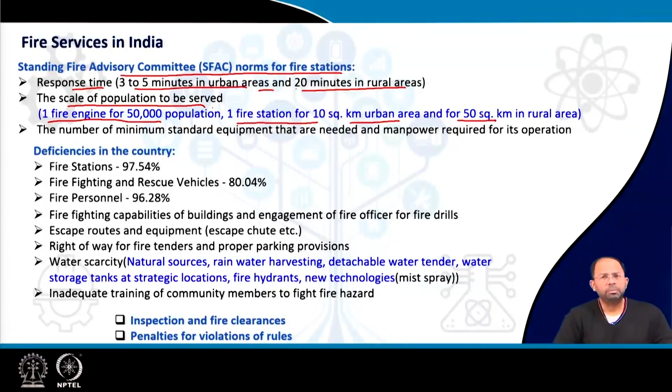Considering the scale of population to be served, the norm is around 1 fire engine for every 50,000 people and 1 fire station for every 10 square kilometers of urban area, and for rural areas 50 square kilometers. So if 1 lakh people stay in 10 square kilometers, we will have 2 fire engines and 1 fire station. The minimum standard equipment and manpower required for operation, that is, how the fire station should be organized, are also specified in these fire advisory norms.

Now, this advisory committee also recognized that our country is lacking in fire services to a huge extent. For example, the deficiency is to the extent of 97% in regards to fire stations. In regards to firefighting and rescue vehicles, the deficiency is around 80%. In regards to fire personnel, the deficiency is around 96%.

So it's a huge deficiency that needs to be addressed, and that's why there have been many cases of fire in recent years. In many cases, we have found out that the complexity of the events are so difficult.

For example, when there was an event recently in Kolkata regarding one hospital fire, the patients died because they were not able to be evacuated. Then there are other cases where chemical fires are there. How to fight those kinds of fires? In cases where maybe an X-ray or a radioactive machine gets compromised by a fire, how to deal with those kinds of emergencies? So there are a lot of technical concerns also which has to be addressed.

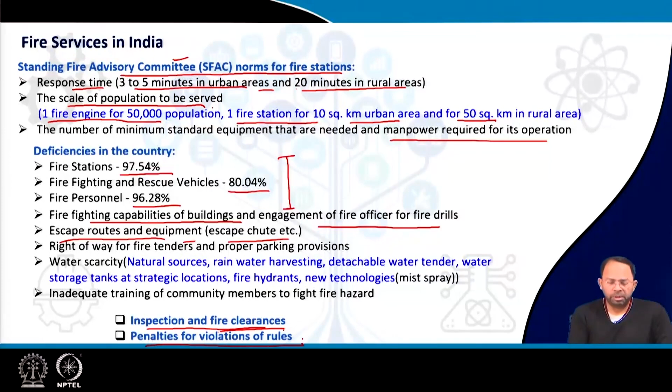Right now it's mandated that every building needs to have fire clearances to be given the final completion certificate, and this inspection and fire clearances are usually carried out by the fire services department. There has to be strict penalties for violation of rules, otherwise people will not follow, or people will somehow go around or bend these particular rules.

Now the other aspect of firefighting is the right of way of fire tenders. In India we have very limited right of way, and in many cases large fire tenders have difficulty negotiating the traffic. So plans need to be formulated, and also proper parking provisions in areas where firefighting will happen—in critical areas there has to be parking provisions so that fire tenders can be parked there and then fight fire.

Then the other aspect is water scarcity. Many of our urban areas are very dense and don't have water bodies nearby. So we have to make provision for natural sources, rainwater harvesting if required.

Detachable water tenders could also be added, and we can have additional water storage. We can also have water storage tanks at strategic locations, and fire hydrants could be laid out. Certain new technologies such as mist spray could be considered for fighting fire, to use less water to cover more area, or to make provisions for storage of water at different locations.

Finally, there is inadequate training of community members to fight fire hazards. We don't have any proper training of community members so that in case of fire they can help in fighting it. So this kind of training could be conducted as well.

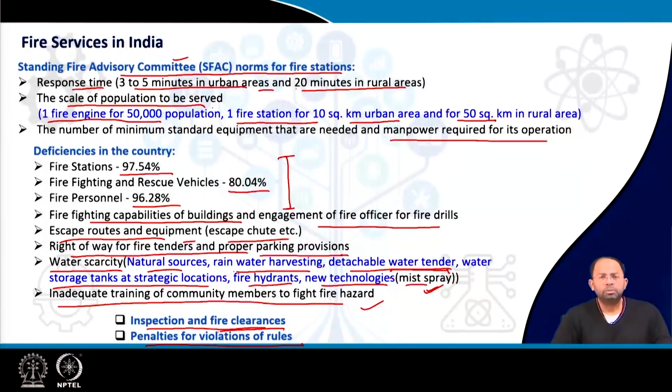So these are some of the aspects which need to be looked at, or these are the deficiencies which need to be taken care of in our country.

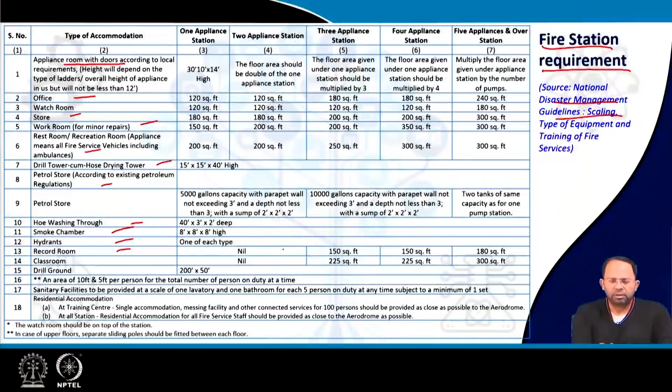As you can see, for single unit fire stations and multiple unit fire stations, these are the values given here. For multiple units, the floor size is multiplied, and we have different sets of requirements for larger fire stations as well. These are standards which could be followed to determine, for a particular area and population group, how many fire tenders would be required, and based on that, what should be the location and size of the fire station. So the size of the fire station can be determined using this particular chart.

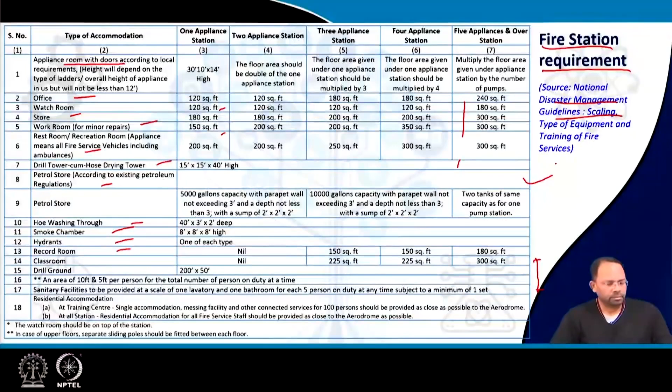So how many fire tenders are required? These are water tenders or vehicles with water tanks used for fighting fire. Usually for 50,000 people we should have 1, for 1 lakh people we should have 2, but for 3 lakh people we can have 6, and for every additional 1 lakh we should keep adding 1 fire tender. This is more or less the standard given in the National Disaster Management Guidelines.

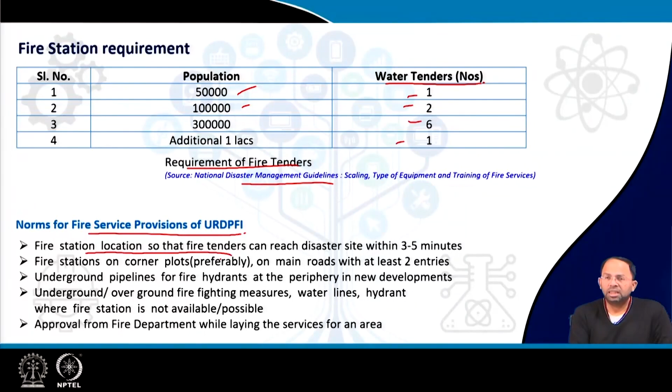As per the URDPFI, there are additional considerations for urban planners on how to provide fire stations. The station location should be such that fire tenders can reach the disaster site within 3 to 5 minutes, same as the committee guidelines. Fire stations should preferably be on corner plots so that movement and parking of vehicles are easier, and should be on main roads with at least 2 entries so the station is easily accessible from other areas.

Underground pipelines for fire hydrants should be provided at the periphery of new developments, so fire tenders can connect their hoses and use that stored water for fighting fires. Underground or overground firefighting measures such as water lines and hydrants should be provided where a fire station is not available or possible. There are many dense areas where at least fire hydrants should be available so fire tenders can utilize those.

Approval from the fire department is needed while laying services for an area, since multiple fire hydrants and other services must be laid out, and permission has to be taken from the fire department as well.

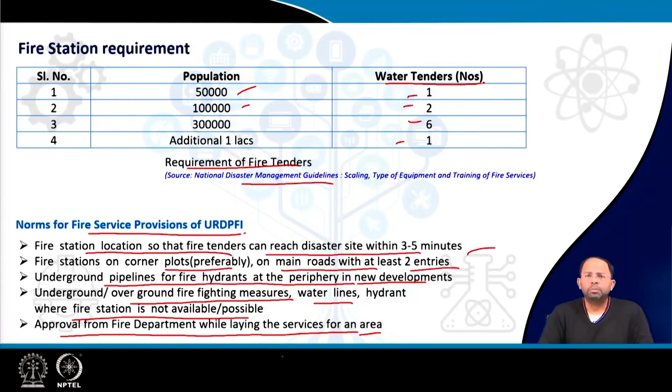Now coming to emergency fire service design, there are different things we need to first understand, such as the fire demand zone. How do we categorize different areas into zones? The zone should have relatively homogeneous land use, meaning it should be roughly uniform. It's better not to mix an industrial area with a residential area, because the hazards and risks are different, so we should have different provisions for fighting fires in each. That's why zones should be relatively homogeneous.

A zone can be a single complex of buildings, a factory producing or using hazardous material, a church, a hospital, or an area of relatively homogeneous structures like a residential area. Now, how do we determine the requirement or the distance for that zone? For that we determine the demand for fire service within a zone.

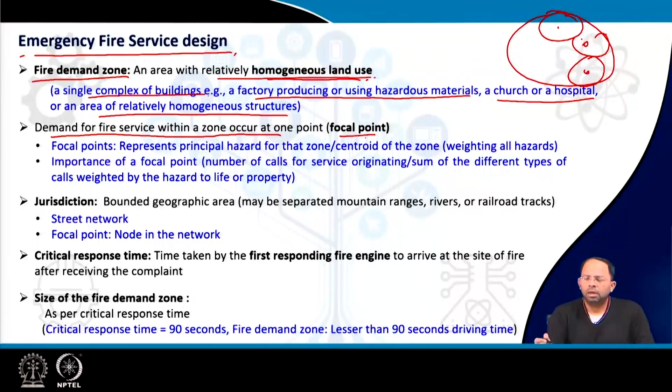We determine a single point, the focal point. If we have a large area, we break it into different zones, and there could be a focal point for each zone. The focal point could be the centroid of the zone, or it could be the major structure susceptible to fire. Whenever we measure the distance or time for a fire tender to reach a zone, we measure it from the location of the fire station to this focal point.

So the focal point represents the principal hazard for that zone, or the centroid of the zone, which could be determined by weighting all the hazards. For example, if a zone has one industry and a residential area, each with different levels of risk, we can assign weightages and multiply to determine the approximate centroid. So it may not be the geometric centroid, but a weighted point based on distance from different risk levels in that zone. It's a representative point in the zone used for further calculations of distance and other parameters.

Jurisdiction is the bounded geographic area, which may be separated. It could be based on administrative boundaries, but it can also be separated by a mountain range, a river in between, or a railroad track. All these things need to be considered when we define the jurisdiction, and we can divide it so that one fire station will serve this part, another fire station will serve another part.

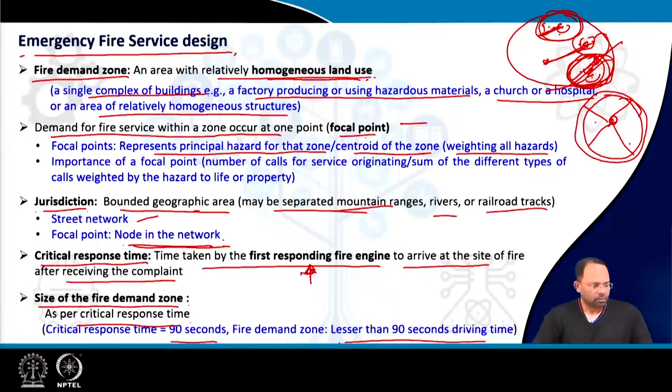Next comes the classification of different risks. Different areas have different risk levels. For example, flammable and explosive risk factors apply to gas stations, LPG stations, and factories. For general hospitals and schools, people are vulnerable, so they have to be evacuated, requiring stretchers and similar provisions. Shopping malls, supermarkets, entertainment venues, subways, and train stations are crowded, so you need to manage the crowd and require other kinds of manpower. Government offices, scenic spots, scientific premises, libraries, science and technology museums, archives, and galleries are key areas which need to be protected.

Residential areas are general fire protection areas, while emergency shelters are emergency protection areas. Accordingly, we can classify these areas as per different kinds of risk, and based on that determine what sort of services or equipment we should carry, or how important that risk is. All these things can be determined from this.

In addition, we can map other hazards as well, such as geological hazards like subsidence, meteorological hazards, biological hazards, human-caused intentional events like terrorist activity, and technological hazards based on certain failures of technology. All these different kinds of hazards could also be present in an area, so that also needs to be considered along with determining the hazard and risk.

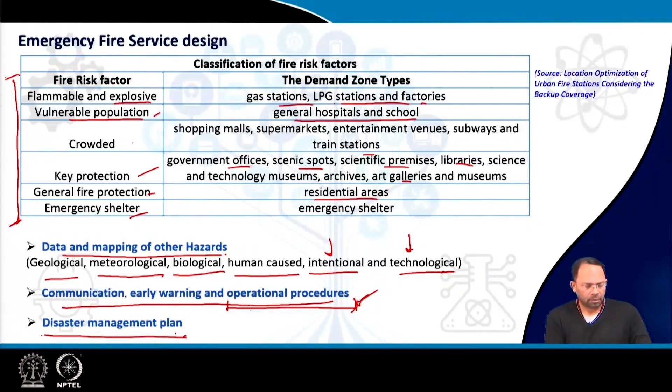So, to determine what sort of hazards, and the time of those particular hazards, we need to create certain databases. Fire and rescue calls and their timings for the last 5 years are usually recorded. For example, total number of fire and rescue calls coming from a particular area, such as number of fire calls, number of rescue calls, number of gas leaks, building collapse, hazardous material calls, animal rescue calls, and other calls. And similarly, we record data on lives lost, lives saved, numbers of injured, property saved, and property lost in financial terms.

Based on all these records, we can determine which zones are more hazardous, what kind of hazard it is, and accordingly we can designate separate zones in an area. And then we also record the timings of different calls received from 7 hours in the morning to evening, and from evening throughout the night to 7 hours. So we can record at what time of the day the calls are coming.

This will help us to understand or predict the requirement for staff and equipment at different times of the day, at different seasons even. So that actually helps us to do trend analysis to determine what kind of manpower we should have at different points of time and what sort of preparedness we should have at different points of time.

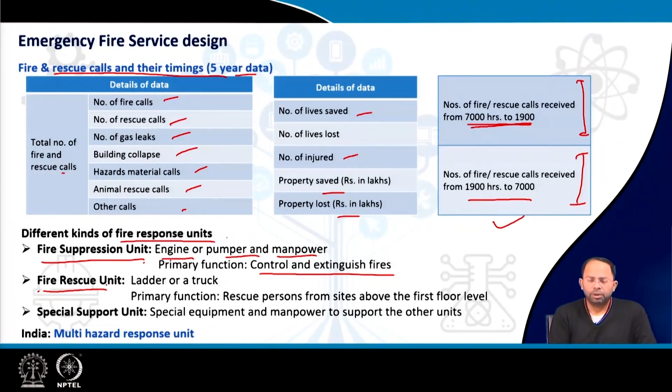Then there are different kinds of fire response units. Usually there is a fire suppression unit. This is a fire tender or a pumper, along with manpower, of course. Its primary function is to control and extinguish fire. Then there is a fire rescue unit, which is basically a ladder or a truck, whose primary function is to rescue persons from sites above the first floor level. So people willing to jump out of a window, or maybe somebody got stuck somewhere. So all these things are important. So this is the fire rescue unit.

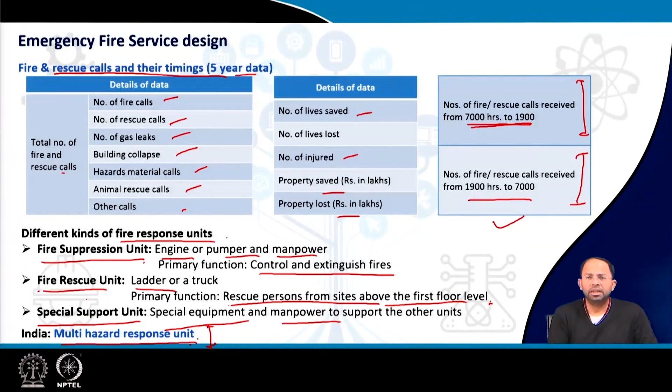And then there are special support units which have special equipment or manpower to support either the fire suppression unit or the fire rescue unit. So in India, usually we have multi-hazard response units. That means units can also respond to multiple kinds of hazards. So we have got different kinds of personnel inside each unit that could be utilized to respond to different problems.

So the response time. Now we have to determine how do I do location allocation of fire services? How do I distribute the different fire stations in an area? So the response time is the primary factor, of course, as we have learned. It depends on the area where the incident has occurred and the pattern of fire incidences. That means in an area, if a fire breaks out very often, at one point of time there could be multiple fires.

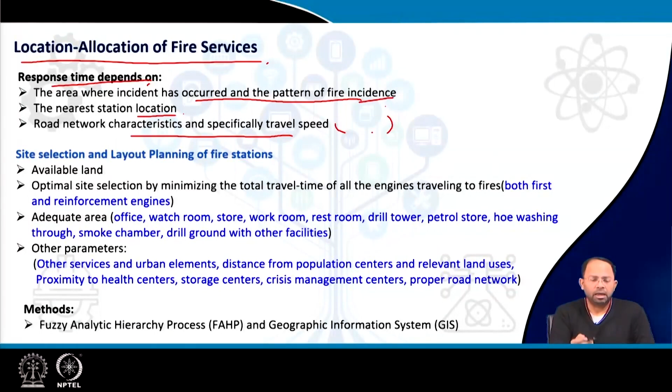So based on the incidence patterns from recorded data, we can determine that, and also the area, how dense it is, what sort of people live there. All these things play a role in determining what sort of response I should provide and in what time I will be able to provide it. Then the nearest station location from that particular area and the road network characteristics, specifically the travel speed that is possible in that area during that point of time. So this overall determines at what distance and at what density we can locate fire stations in an urban area.

Now, site selection and layout planning for fire stations is based on available land, of course. These are primarily government land. Then optimal site selection by minimizing the total travel time of all engines traveling to the fire. We can determine one dedicated fire station or one fire tender for one area, or we can consider that multiple engines will travel to that area from surrounding zones as well. So we minimize the travel time of all engines together. So this is basically a location allocation problem.

And in GIS, we can solve this very easily using some tools. Here we can determine the location of the fire station as per the distribution of events, or fire events and so on. So in case of multiple engines, both the first and the reinforcement engines, both their times are considered, and accordingly we determine which would be the suitable location for the fire engines.

For example, the way we go about is, I have the city, we divide it into different zones. Now I locate the fire stations based on available spaces and all these things. So this becomes one option, and some locations could be skewed.

Then we put a distribution of fire events and see what is the minimum time in which this could be addressed for different fire events. And based on that, we can minimize the overall travel time for that area and determine which should be the best possible scenario for locating fire stations in that area.

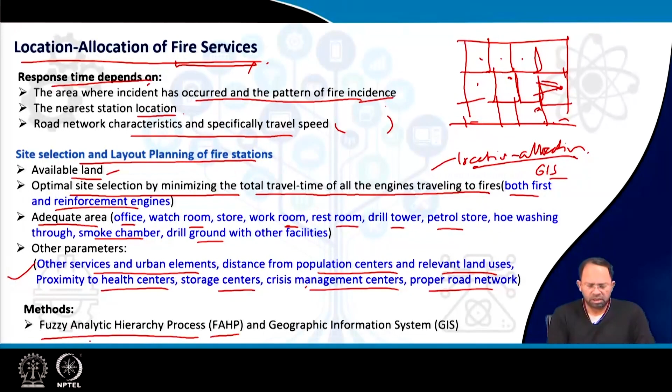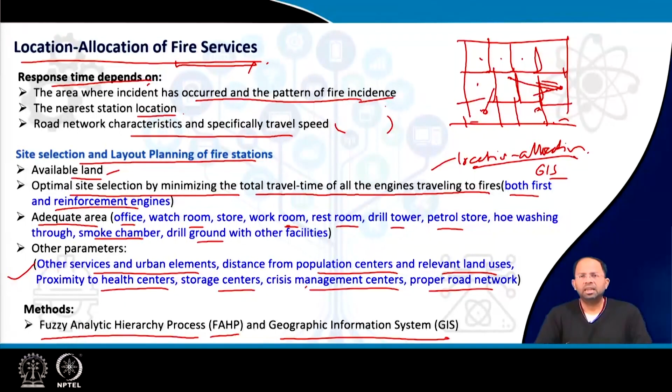And then geographical information system is usually used to determine the travel time or response time to different fire events. And based on these two data, that is the importance of that location as well as response time, we can take a call on which is the best possible scenario for setting up fire stations, or which possible locations are best for setting up fire stations in an urban area.

So the allocation models could be of different types. One could be a time constraint model, where in the conventional approach, the idea is a station has to be located within a given distance or time of each focal point. So we have got different focal points in an urban area, more hazardous areas and so on.

So the fire stations have to be located in such a way that they are within a given travel distance or time from that particular focal point. So this is a constraint-based approach. There is a constraint of travel time.

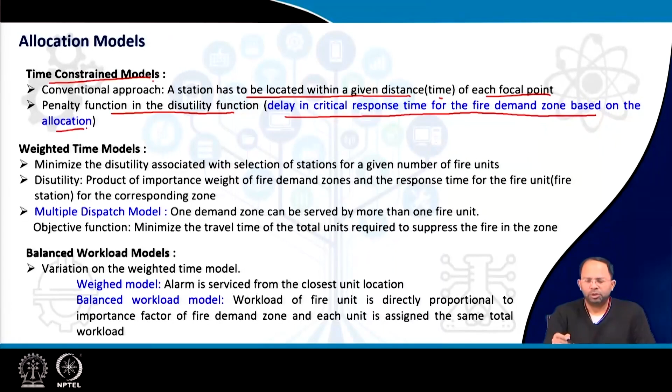The penalty function, so we can use disutility functions here as well. A penalty function is introduced where, based on the delay in critical response time for the fire demand zone, the allocation is determined. Suppose we have a certain scenario of allocating fire stations in an urban area. If I do this sort of allocation, what is the overall delay that is happening?

So we determine the delay in critical response time compared to the standard, and then we change the locations, and for another scenario 2, we create locations at another point, and then we again determine the delay. Wherever it is least, we will adopt that as the best possible option. But initial locations are selected based on other factors, weightages and so on.

Now weighted time model is where we minimize the disutility associated with selection of stations for a given number of fire units, and here the disutility is a product of the importance weight of the fire demand zone and the response time for the fire unit. So it's not only based on the response time, but also based on the importance of the fire zone.

So if an area is important and I am delayed to reach there, then there is more chance of damage. That's why the importance of that area is multiplied with the response time, and overall we determine the disutility of locating these stations, then determine which option is the best option, and then we choose that option.

Now, the multiple dispatch model is a modification of the basic model. In the basic model we only consider that one demand zone can be served by one fire unit, whereas in the multiple dispatch model we can assume one demand zone could be served by multiple fire units from other areas. So in this case, the objective function is to minimize the total travel time of the total units required to suppress fire in the zone.

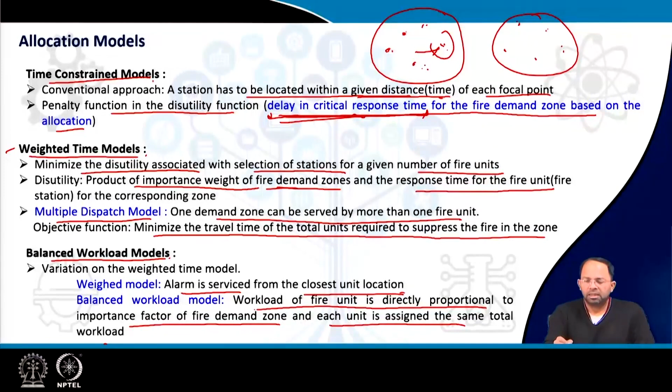Now there is one variant of this weighted time model, which is the balanced workload model. In the weighted model, whenever an alarm is there, that is, an event has happened, each alarm is serviced by the closest unit location. That means the closest fire station will respond to that. But in the balanced workload model, the idea is that the workload of a fire unit is directly proportional to the importance factor of the fire demand zone, and each unit is assigned the same total workload. So every unit's workload should be similar.

So one unit can reach a certain area, another unit can reach a certain area, but the location of the unit should be such that the overall workload for this particular unit is the same, because the hazard and all these things are different for this area. So overall workload needs to be balanced for all the different units. So this is a much more complicated way of doing this. This is the most basic way.

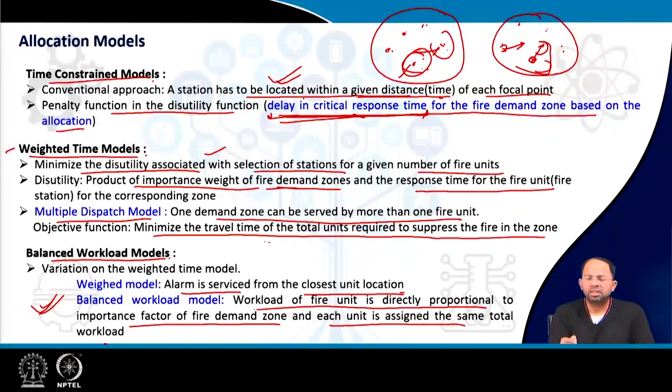This is where a little bit of complication comes in, because you have to understand the importance of each zone, and this is further complicated because we are considering that multiple fire units will respond to one. We can do that here as well, but here we definitely have to understand that each unit has a different workload. We have to balance not only the response times and the importance, but also how much work each unit is doing, and that has to be prioritized.

So this is a case study from Tehran. The selection of location is done in 3 stages. The first stage is pre-selection of certain plots or areas where I can set up the station. This could be done using GIS tools. Here the considerations are land use compatibility, quality of the building, size of plot, building age, level of occupancy, number of floors, building density, building materials. All these things are considered to do some pre-selection of plots where we can set up the fire station.

And then based on GIS tools like union and intersection, which are standard GIS tools, when you overlap different layers you can take out certain portions of it, common shared areas and so on. So using these kinds of standard GIS tools, we can determine which are the available areas where we can set up fire stations. So this is the first step.

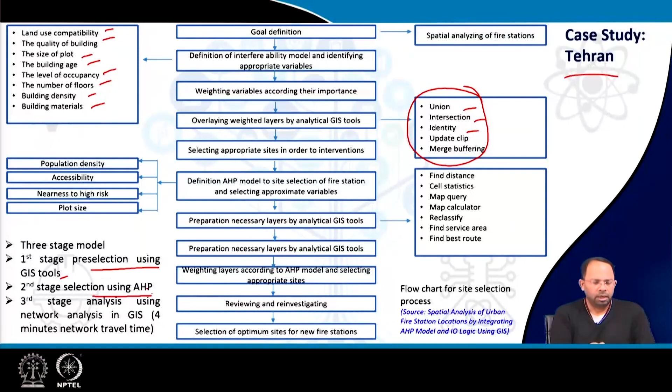The second step is where, using AHP, we determine the importance of those particular areas. Here population density, accessibility, nearness to high risk, plot size, all these things are considered for defining the AHP model of site selection for fire stations and selecting appropriate variables. That means we determine which variable is more important compared to the other using pairwise comparison, and we give weightage to different aspects, and overall this helps us determine the second layer of importance for the different locations.

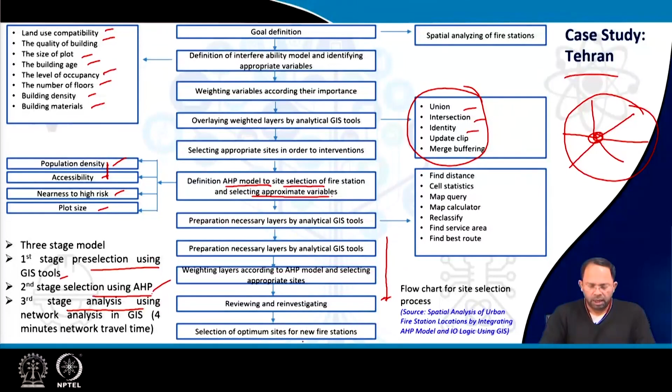The third stage is, once we have determined the importance, we now need to determine the distance of travel or the response time. So the third stage of analysis involves network analysis. Using network analysis in GIS, we can determine from any point or the location of the station what is the time to reach all the other points. We can add this all up to determine a figure for the total amount of time taken for response. So multiplying the importance of that particular factor and the response time, and combining all these factors, the location of optimum sites for fire stations is determined in this particular study.

To conclude, efficient, well-planned and well-equipped fire services are essential to respond to fire events, and significant deficiencies in regards to fire services in India need to be addressed through adequate funding and technological interventions.